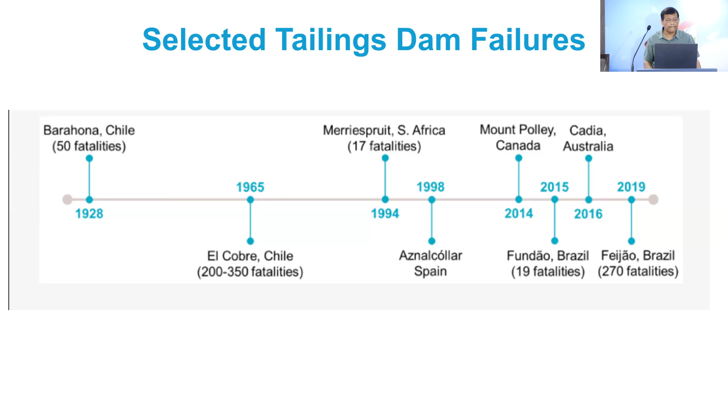Again in Chile, there are a few failures due to seismic liquefaction. Chile is a highly active seismic area, and the main cause, if you look into that, is the slope. Can you see the slope? 2:1 slope. So that's a very high slope. That's why right now we have decided on a 3:1 slope. So most of these failed mainly because of the upstream, the slope is high. And during the earthquake, they didn't resist.

So you can see one of the examples, before failure and after failure. That's the big one, but once it fails, everything can go. And these dams, the upper one was 70 meters high, and this one also 40 meters high. Height is not that important, the slope is very important.

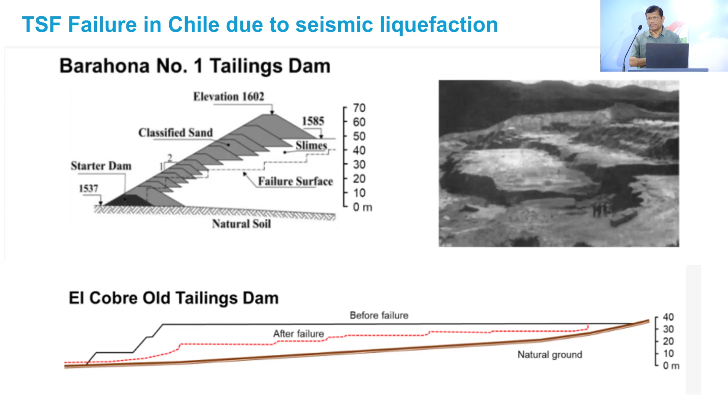Okay. This is the Brumadinho failure, which we already have seen before. I will also show you something. If you look into Brumadinho, on the left you are seeing that at that time it was intact. Early January. This happened on January 25th. This is another image, early February. So you can see that it took everything. It started with a small one, but gradually took everything.

I also had slides. I did some work here also. I was looking at different days. This whole thing took about one week to happen. It doesn't happen immediately, because it's progressive. Once your first failure starts, then the next one, because now your slope is different, it will generate the other failure. It's a progressive failure.

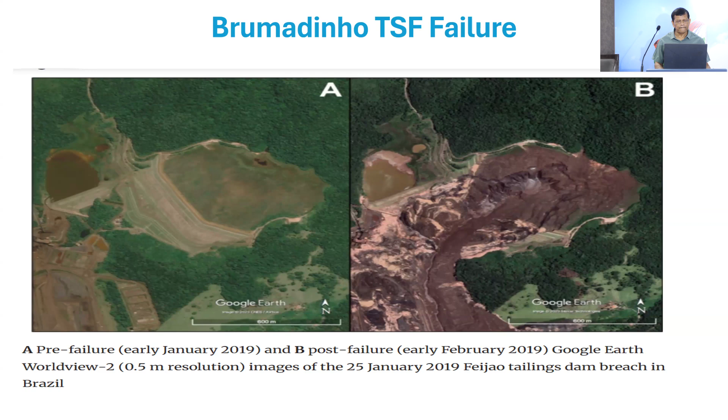And you can see this one also, the image before the failure, how it looked, and you can see these are more than 5,000 meters. At the bottom, that blue line is the before, and once it hit the river, it stopped. So you can easily see the image. These are satellite images. The satellite image is very clear, clearly showing how this whole tailings progressed and moved along these areas.

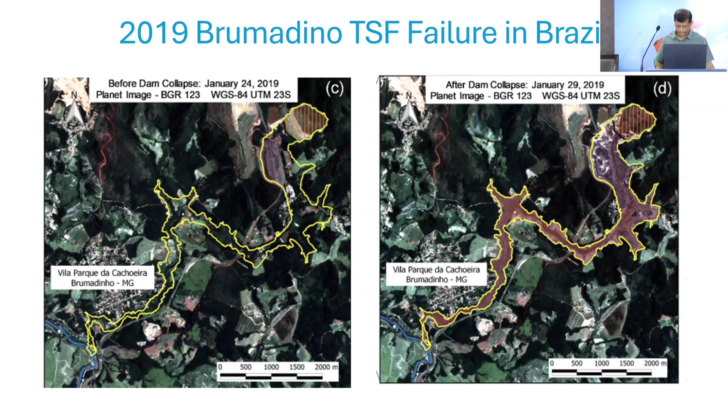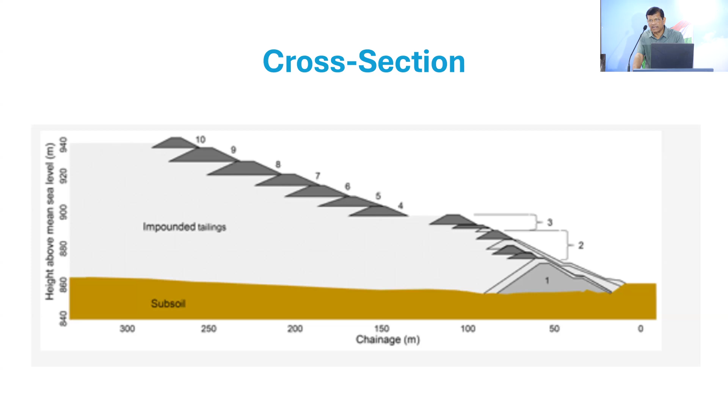This is kind of the cross section of the dam. So you can see so many raises, close to 10 raises. Initially you have a starter dam, but then it goes on raising. These are all showing the starter dam, then the second raise, then the third, fourth, fifth, sixth, going up to the 10th.

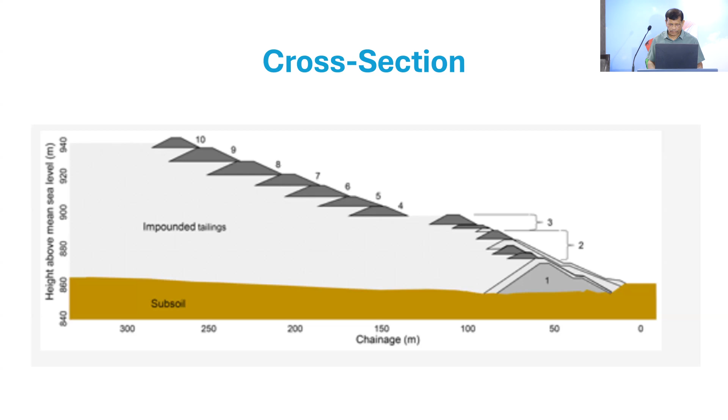Again, there is not a consensus. Till now, most of the experts have not agreed. But this one is the latest one. Initially, in Brazil, the government had an expert committee. They said it was mainly due to high storm water. Prior to the failure, they found that there were big storm events, more rainfall occurred prior to it.

Then the second group, a research group that came from the university, did a lot of work, and they found, yes, it liquefied, definitely everybody agrees it liquefied, but as for the cause of liquefaction, at the time of failure they were doing some drilling. They were trying to install some piezometers. So they were doing the drilling.

And their model shows that the drilling hit a critical layer there, like a weak zone. And when it hit that weak zone, it triggered the liquefaction and all the failure happened. So that was their thing. But this one, when I read these things, I pretty much liked it. So you can see that

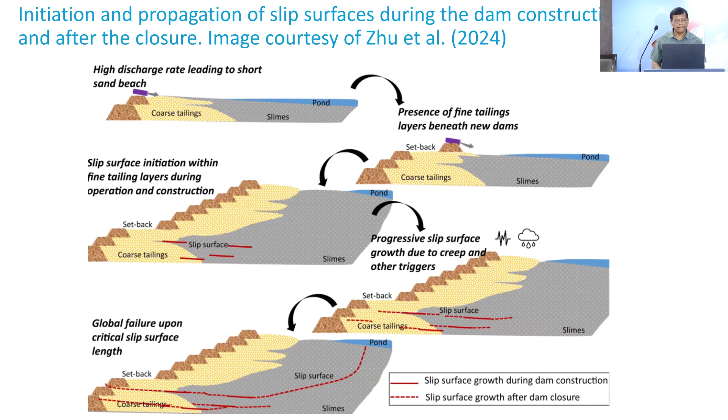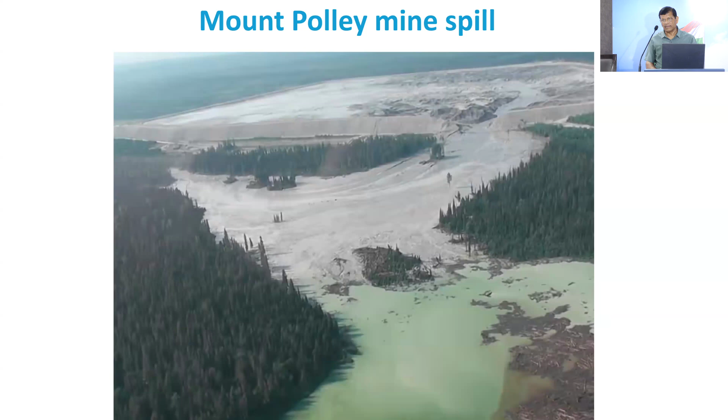Next, we go to Mount Polley, and you can see that there was a lake. I think the main factor why it was highlighted a lot is that there was a lake there. And that lake was a big issue. You can see that it is very close to the tailings, and once it failed, everything went into the lake.

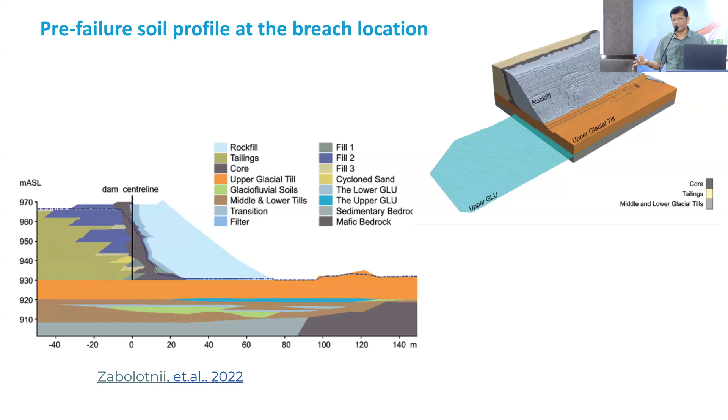Investigators revealed, because a lot of research has gone here, that in the design of the dam they missed that layer, because it was very thin. If you go back again, it was very thin and not everywhere. So when you are doing the borings, maybe they missed it. So this was not considered in the design. That's what the investigators are saying. The design also lacked sufficient consideration of the potential for undrained failure.

Okay? So Mount Polley changed the whole design. After Mount Polley, the norm becomes undrained. That's the reason people also switched from limit equilibrium models to numerical models. Because if you consider undrained shear strength, it's very difficult to get a 1.5 factor of safety. So that forced people; limit equilibrium is not giving you anything. But limit equilibrium you can still use. But the 1.5 factor of safety you won't get.

So now let us do the numerical model. Again, the numerical model is the solution. Because some of these kinds of failure, like the failure which occurred, you cannot get in a limit equilibrium model. The limit equilibrium model will not show you, because in the limit equilibrium model you are giving that strength. That's fixed. In the finite element model, that strength can change. And it will show us whether it is liquefying or not liquefying. So this made it the norm that you have to do that. Again, the failure, as we have already discussed, went to the lake, and then a lot of remediation effort was needed.

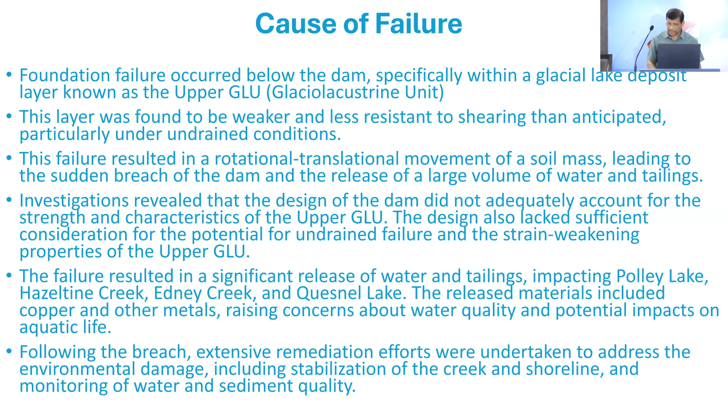Some simple concepts I think we have already mentioned. Okay, some simple concepts, like how this undrained behavior is mostly related to brittle soil, which is contractive. Like earlier we showed in the CPT how you can differentiate between contractive soil and dilative soil. So it has to be contractive soil, and you can see that at peak, the Su ratio can be 0.35, but in the residual it can be, the minimum we have seen, like 0.05 in some cases. So when it liquefies, there is no strength; the same soil can have 0.35 when you start, but then it drops. That's why the ALARP, I think we said that yesterday.

So what is the risk probability? This comes under risk, how we see it. If the probability is 10 to the power minus 3 to 10 to the power minus 4, that definitely gives caution, like you are not good. But if it is lower, like 10 to the power minus 6, there is low probability that it will happen. So that's good. That's why this ALARP is here. And here you can see where exactly the ALARP is, like that green circle, which is called the sweet circle. The name is sweet, it's very good.

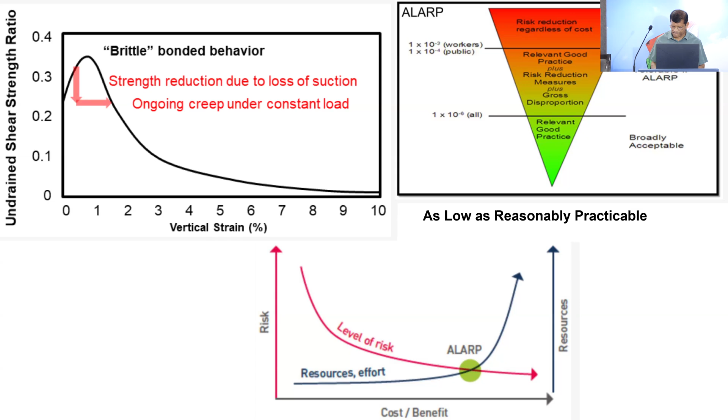Again, that's why after the human side we have the GISTM. So you can see how they are all linked. Like any company, they have a board, the board of governors of the company; if there is anything, they are responsible. A lot of companies go bankrupt and immediately they have to change their board of governors. And then the CEO. But there should be one person, what GISTM calls the accountable executive.

So that accountable executive is connected to higher management and also all the operations and everybody. So this executive is now connected to everybody: the tailings facility operator, the engineer in charge. Like you guys are the RTFE. Your role is mostly acting RTFE.

Unless you are the EOR, because the EOR is mostly the consultant. And the EOR is just one person, but again, that company, the consulting company, supports the EOR. So it's a company responsibility also. So though you are one person, there is a whole group of people who work with you.

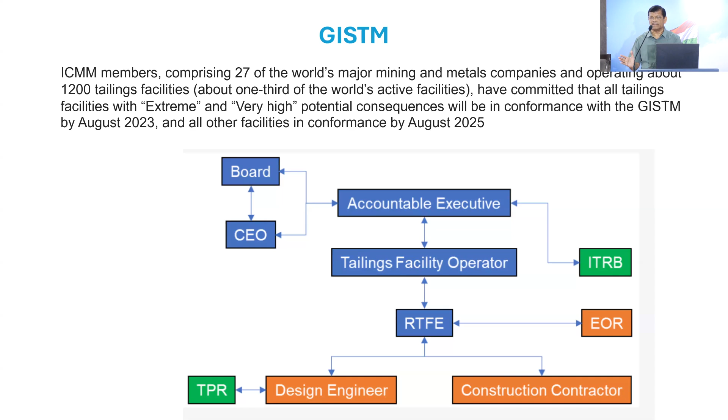Again, I am putting a little bit of risk analysis, those are coming. First you have to identify the risk, then identify the failure modes, like what will be the probable failure, then estimate the consequences. That's where the analysis comes. So you derive the profile, then you go to the risk evaluation. You identify the risk, do the analysis and evaluate it.

That is ALARP, because we are focusing on ALARP. We should be at a good point there, like your risk is low and cost is not that high, beneficial, but the main thing is we have low risk. So these are done in every stage.

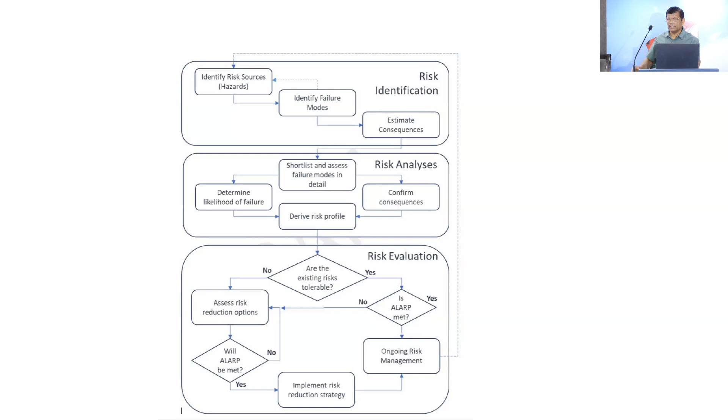This I am showing because there were some questions like what should be a typical slip circle. So in the upstream, you can see that you have to go a little bit beyond the last one, and it will come out a little bit beyond the toes. Because if you have a very strong foundation, you can ignore that. But if your foundation is not strong, then you should go into the foundation, definitely. You should go into the foundation.

Again, another alternative also, if you have coarse grain, because you can see these are all coarse grain, we also see that my slip circle is going through the toe, because the toe is where it will start.

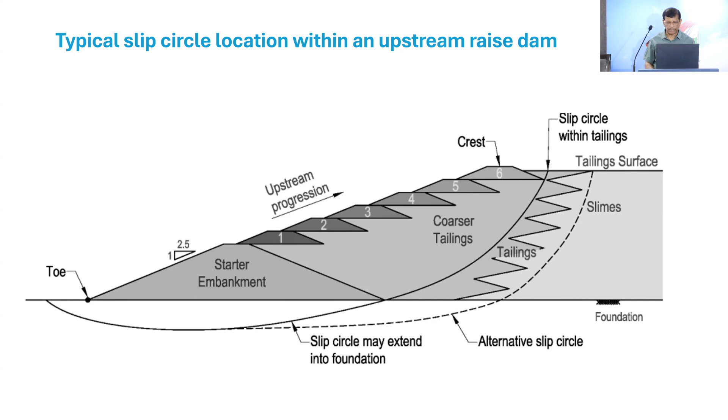Again, the upstream, what are the risks in the upstream? Because we are mostly focusing on the upstream, because a lot of those are still going on. So, insufficient strength of tailings to support new construction. So when you start raising, you have to see where you put your foundation. Is that good? Excess pore pressure, you have to monitor those pore pressures.

Limited water tightness, again coming to the dam. The dam should be watertight, water resistant, and make sure that water cannot encroach through it. So that's the dam you have to focus on. Not like I am just going another way, wherever I want. No, that one is protecting everything. And mostly that's why we want it to be drained and competent.

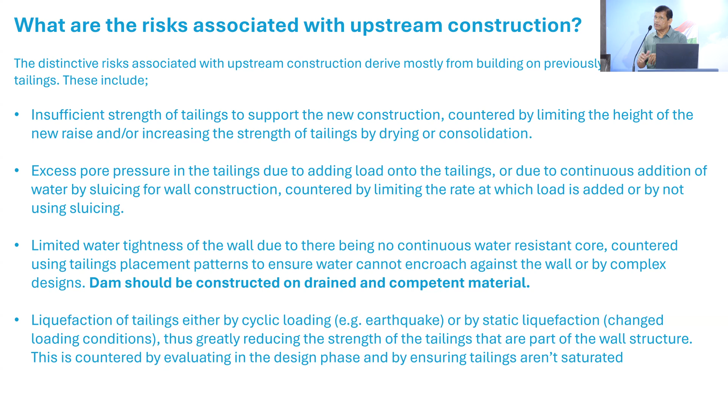Drainage is very important because we don't want water to enter into the dams. But again, whatever you do in tailings, it is very difficult to make sure that everything will be fine. So that's why monitor, put piezometers. Again, the liquefaction, whether cyclic loading or static loading, we already discussed. So check the liquefaction.

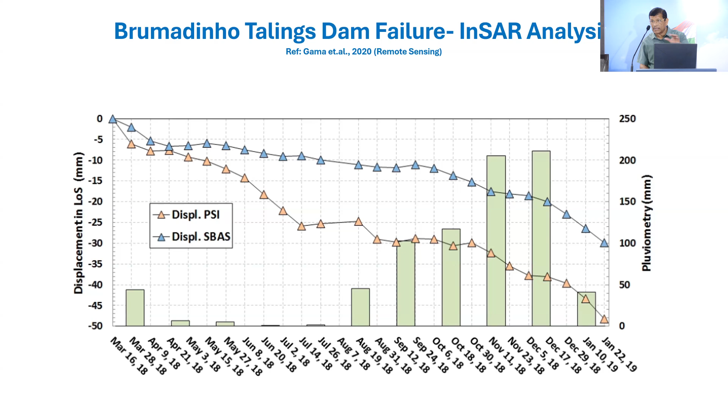So you have to again look at this data and then get. So finally, I will not go into much detail, but this will be a tailings dam monitoring system which is coming now. So it doesn't start at the end. If you see this diagram, it starts from the very beginning at level 1, when we start the project. Level 2, you go to the construction. Level 3, you go for the monitoring. Level 4, it will give you the early warning.

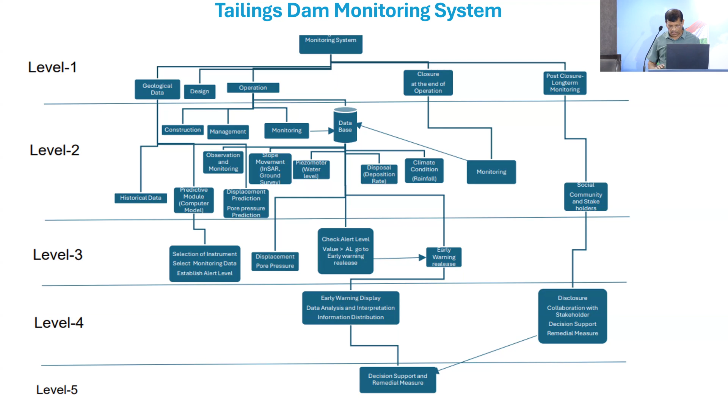When we put any monitoring system, you should have a threshold value, and that threshold value will give you the early warning. And once you get the early warning, then you should have a decision support. Taking that early warning, you should come up with what kind of decision you should take. That's the management. At the same time, you can see that the social and community people are also involved. You are also getting their comments or their opinions, and all this is counted here.

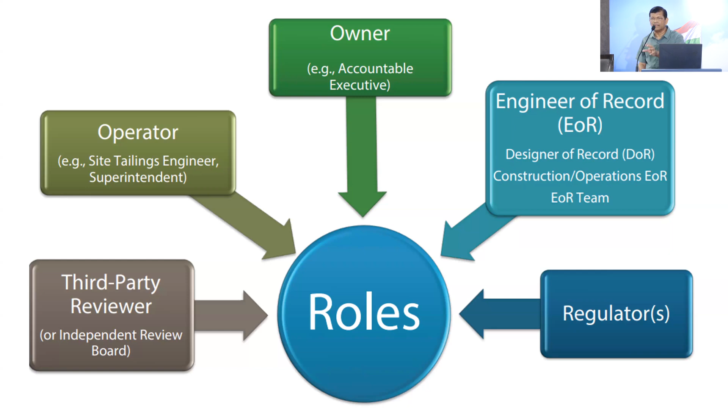And finally, this diagram you have to take in your mind. You have these people here, they are all responsible for design of the system, not only design, but operation, construction and closure. So with that I end our talk here, and I hope you all got at least a good concept, and you can take this knowledge and try to use it on your site. Now you can go back to your site, look into your things and see, I learned this, let us see whether my site is following this or not.